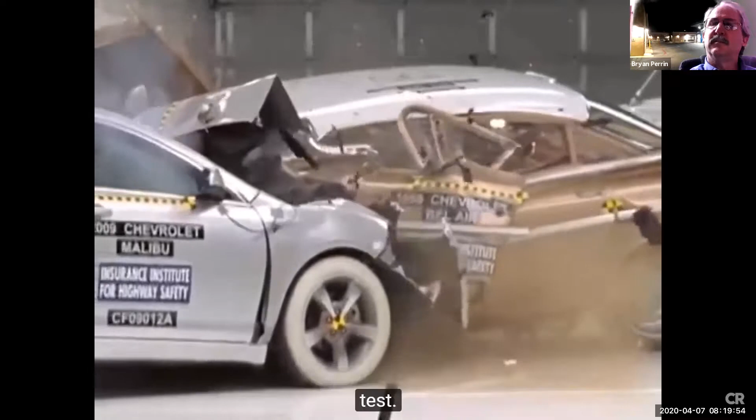Holy shit. Oh, you see? The new one is better. Told you. 2009 Chevrolet Malibu and 1959 Chevrolet Bel Air. In slow motion, you can see the differences in how the new and classic cars perform in this version of the traditional frontal offset test. The Institute conducted this test to commemorate its 50th anniversary.

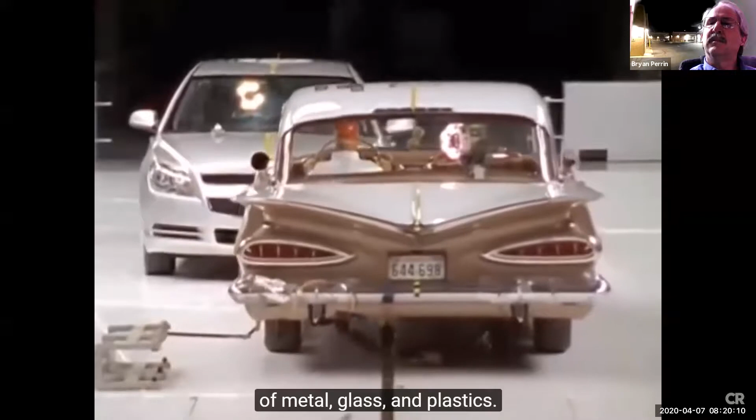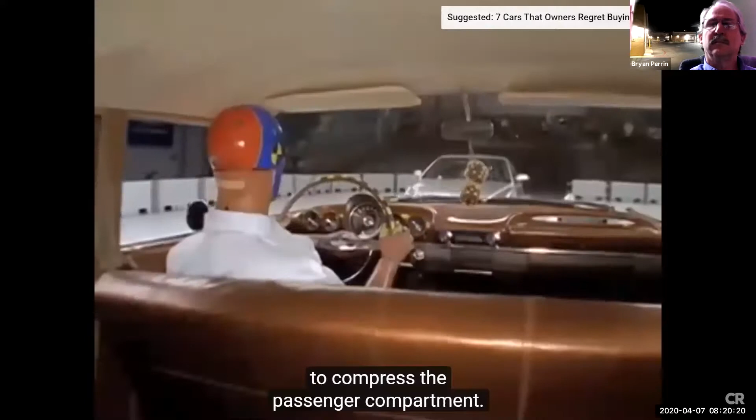It dramatically shows how much improvement has been made in passenger protection since the nonprofit organization opened its doors. The two cars collide in an explosion of metal, glass, and plastics. Where the Malibu crumple zone absorbs much of the crash forces ahead of the windshield, the Bel Air structure allows the lighter car to compress the passenger compartment. The impact is made worse for the Bel Air driver by the lack of airbags, head restraint, and even a seatbelt. Now, did you notice how that steering wheel came up right into the person?

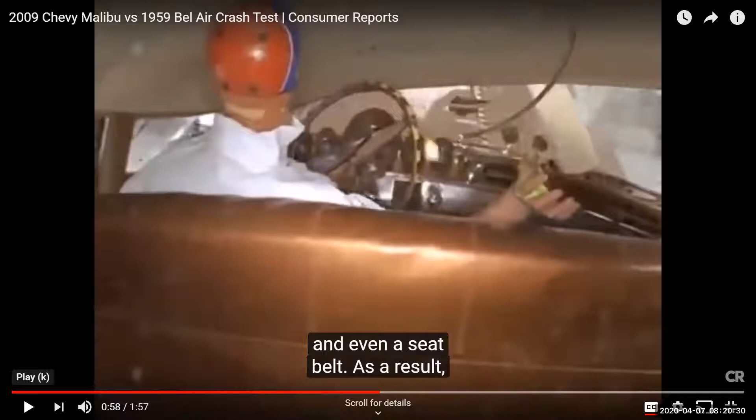Yep, damn. Because prior to 1967, steering columns were a solid piece of metal. They did not collapse. So that's kind of like a javelin going right into the driver. So 1967 saw a lot of safety updates, including seat belts, collapsible steering columns, dual reservoir master cylinders. So cars 67 and newer are much safer than cars older than 67. They're still not as safe as today's cars, but that was a big safety thing for them.

Someone else had a comment?

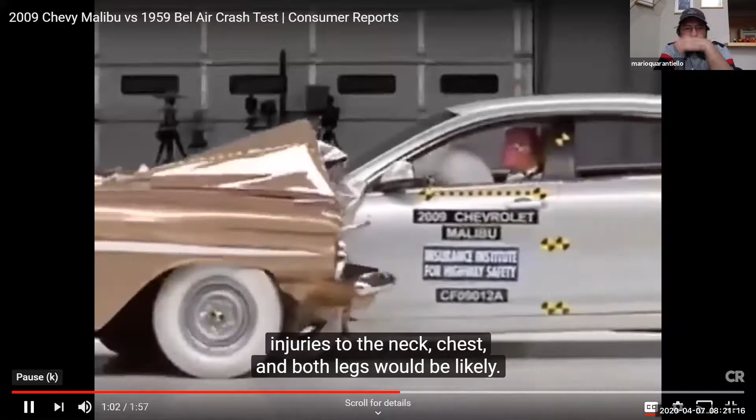All right, let's take a look here. So basically this car didn't have a headrest, didn't have anything other than a lot of size, right? So basically, that was an accident waiting to happen.

Yeah, and I'm getting picked on here because I didn't ask if we wanted to survive, just what we wanted. All right, I didn't say get in an accident, which would you rather be in? Apparently, being in an accident and surviving, I wasn't clear enough.

So take a look here. Also, take a look at the door. See the door here on the Malibu stayed in place. The Bel Air receives a poor rating across the board. On the other hand, the modern Malibu provides good protection, with the dummy movement being well controlled, measures indicating low risk to most body regions, though a foot injury would be possible.

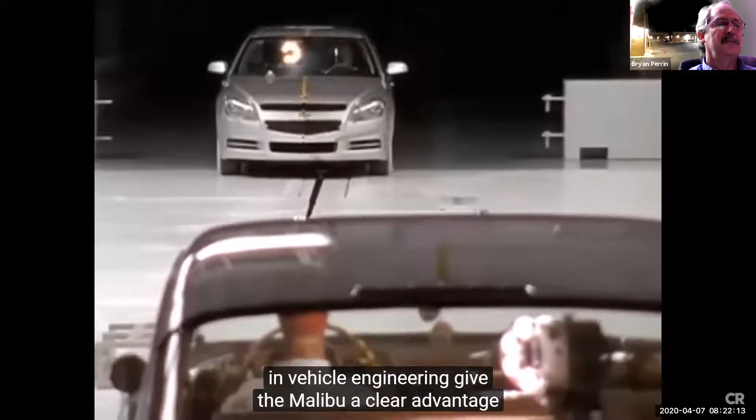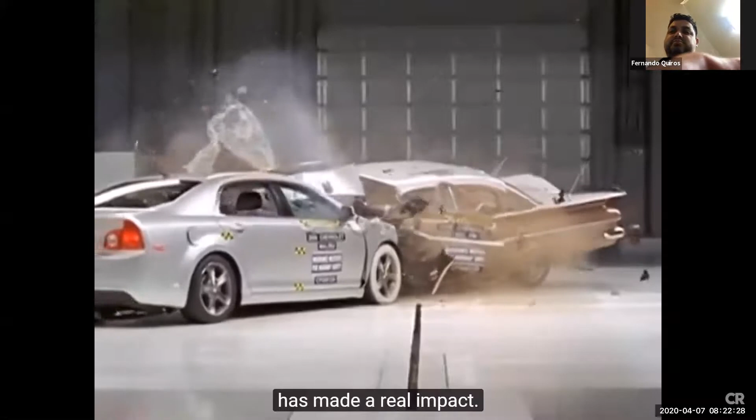Beyond the safety gear, advancements in vehicle engineering give the Malibu a clear advantage in this matchup. While classic cars are often considered rock solid, watch the door on the Bel Air, this demonstrates how much better today's cars are. And the IIHS has played a key role in driving these advancements. The Institute has made a real impact. The roads today are safer. For complete safety information, subscribe.

I mean, even the tire, no? Yeah, pretty amazing, isn't it? I mean, when you think about safety things, you don't think of door latches, you don't think of door handles, you don't think of how the door stays in place, you don't think of how the seat's bolted in. We kind of think of just airbags, but it's really all part of a system, the crumple zones, everything. So when we do repairs on vehicles, we want to keep that in mind to maintain that safety.

Does that depend also on how many miles per hour? I don't remember, it does say somewhere, I just don't remember. It's in the documentation because this test is standardized, so I don't remember how fast they're going, but it is a standardized speed.

Pretty amazing though, isn't it? That's crazy how the cylinder just got smashed up like that. I've had a lot of classic cars, and let me tell you, once I learned this and understood this, I'm a lot more nervous driving an old car than I used to be.

It's normal. But shouldn't there be headrests? It shouldn't be a safety thing, at least you know... the old car? What do you mean it shouldn't be a safety thing? It should be a safety thing. There is none, because of an old car. It's totally a safety thing. And, you know, we don't always think about that when we're in a car.

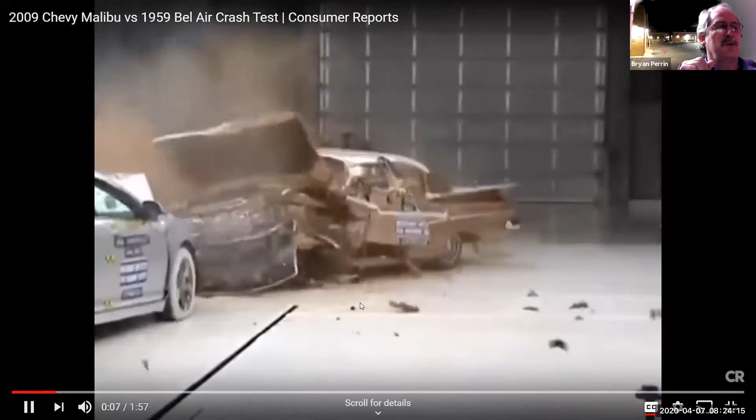And you can see, I'll play this again, you can see how much the airbag and everything else and the crumple zones really protect the driver in the Malibu.

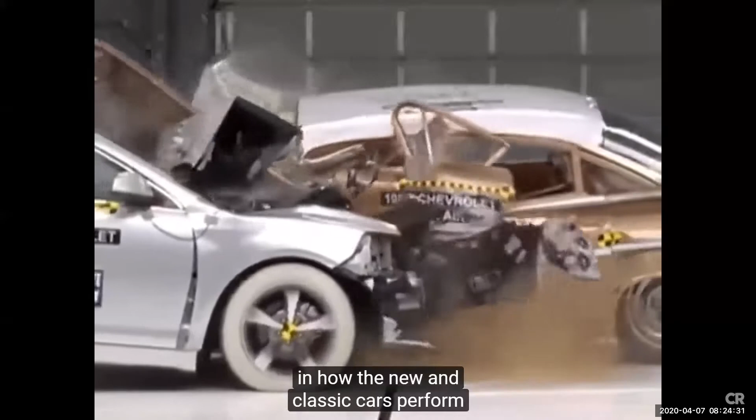Institute for Highway Safety's front crash of a 2009 Chevrolet Malibu and 1959 Chevrolet Bel Air. In slow motion, you can see the differences in how the new and classic cars perform in this version of the traditional frontal offset test. The Institute conducted this test to commemorate its 50th anniversary. It dramatically shows how much improvement has been made in passenger protection since the nonprofit organization opened its doors.

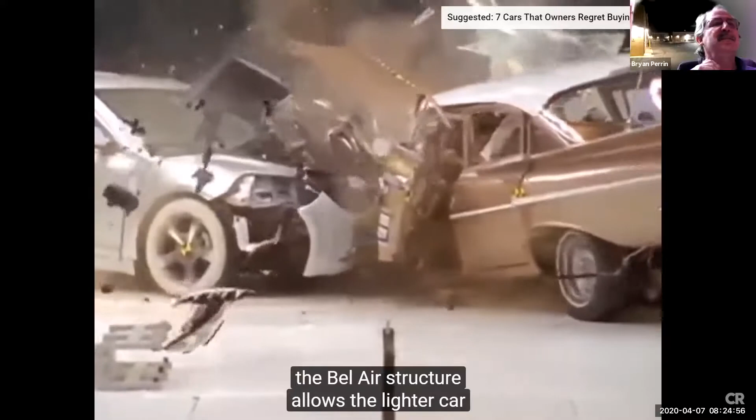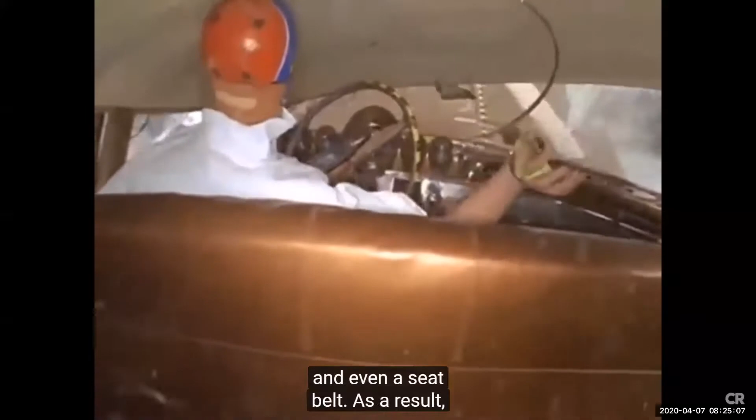Metal, glass, and plastic. Where the Malibu crumple zone absorbs much of the crash forces ahead of the windshield, the Bel Air structure allows the lighter car to compress the passenger compartment. The impact is made worse for the Bel Air driver by the lack of airbags, head restraint, and even a seatbelt. As a result, injuries to the neck, chest, and both legs would be likely. Consequently, the Bel Air receives a poor rating across the board. On the other hand, the modern Malibu provides good protection, with the dummy movement being well controlled. Measures indicate a low risk to most body regions, though a foot injury would be possible.

Beyond the safety gear, advancements in vehicle engineering give the Malibu a clear advantage in this matchup. While classic cars are often considered rock solid, this '59 demonstrates how much better today's cars are. And the IIHS has played a key role in driving these advancements. In the past 50 years, the Institute has made a real impact. The roads today are safer for it.

So pretty amazing, isn't it? Yes, oh yeah. So it definitely has an effect on what we're seeing and what is visible to us, and it should kind of make us think a little bit about the cars we drive and how important those safety features are. A lot of times people buy older cars because of cost or because they like the lines of it, and I drive some older cars too, so I get it. That being said, I'm also well aware that sometimes things are not as safe as I'd like them to be in doing that.

And I see a ha here and then XD. I'm assuming that Shirley has a little Scion XD by that post. Is that correct, Scion XD? Hey, don't laugh, those are good little cars. So it is a laughing face, okay. It didn't come through as that. All right.

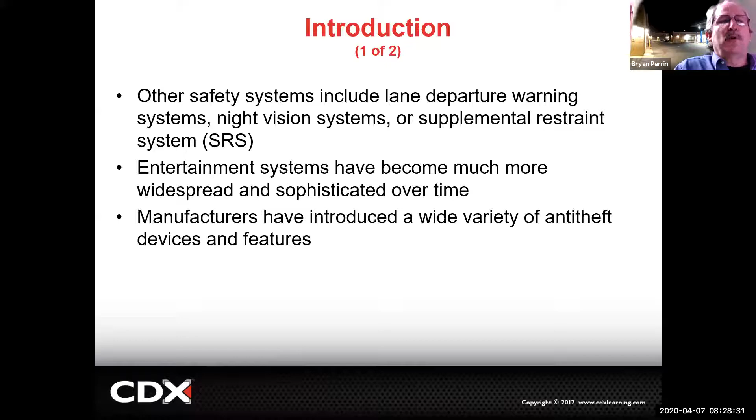Entertainment systems have become much more widespread and sophisticated over time. When I got my first car, it was a big deal to get a cassette player in it with 2 speakers. Now people have cars where the stereo system's worth more than the car. So we've come a long way in sound.

Manufacturers have introduced a wide variety of anti-theft systems and features also to vehicles, making it much more difficult to steal. That's why alarms, which were very popular in the 80s and 90s, aren't as popular now. It used to be the first thing you did when alarms first came out is if you bought a car, you put an alarm in it. Now they come from the factory with anti-theft systems.

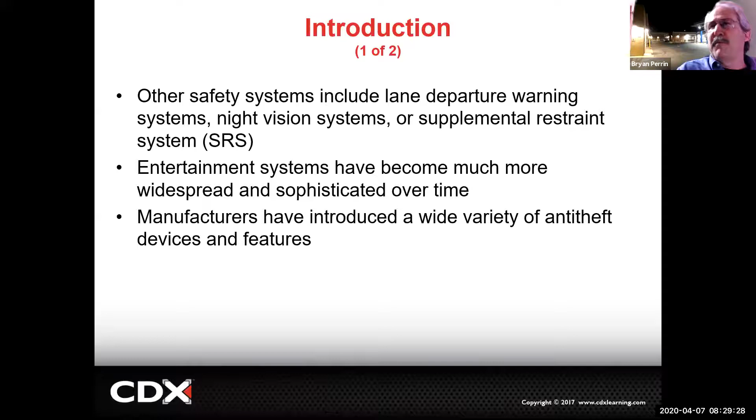You can imagine if I'm driving, like when I was driving to the airport in Virginia from where my daughter lives down to the city with the airport in it, it was pitch black. No street lights on the road, no nothing. It was completely dark, no moon, no nothing. And it was raining, so it was really hard to see. I was going at speed limit, real cautiously, and you really couldn't even see where the road was going. They didn't have good reflectors in the road or anything. So you could see where that thermal imaging, that night vision, could be really, really important for driver safety.

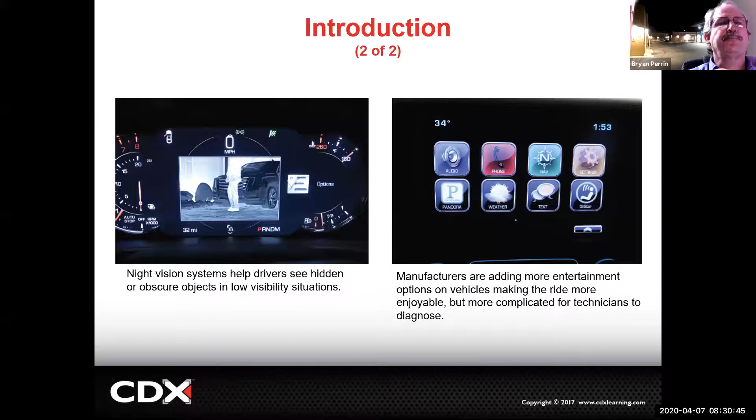One of the things in here talks about diagnosing operation of comfort and convenience accessories related circuits, such as power locks, power seats, pedal height, yada yada yada. We spent some time doing that yesterday. So that's kind of why I tipped into it.

So we played with the mirror circuit. The mirror circuit and window circuit are going to work very similarly because what am I doing? I'm reversing the DC motor. So is my seat circuit probably going to work pretty similarly? Yeah, because I'm reversing the DC motor, which means I need to switch my positive and negative poles on the motor back and forth to get the different directions.

So once I look at how one of those works, I've opened this up so you guys can play with some of the different objects in it. One of the advantages of getting the online component, and one of the things we are concerned about missing, is you're going to get more of that hands-on type here, dealing with some of these different skill builders that we have. Here I'm still going to supplement that with stuff in Canvas. I want to do some demo videos where you guys can fill out sheets and some other stuff. But I think this is a big step forward for us.

Describe purpose and function types of cruise control systems. The book does a good job of this. It talks about the different types of cruise control, how we control them, and really how it's changed.

So cruise control was originally developed to help eliminate driver fatigue on long trips. For me, it tends to work the opposite. When I worked in San Diego till 10:30 at night and drove home, I couldn't use cruise control because I'd fall asleep, and I needed the input. I was afraid of falling asleep on cruise control, fall asleep at 70, it's going to be bad.

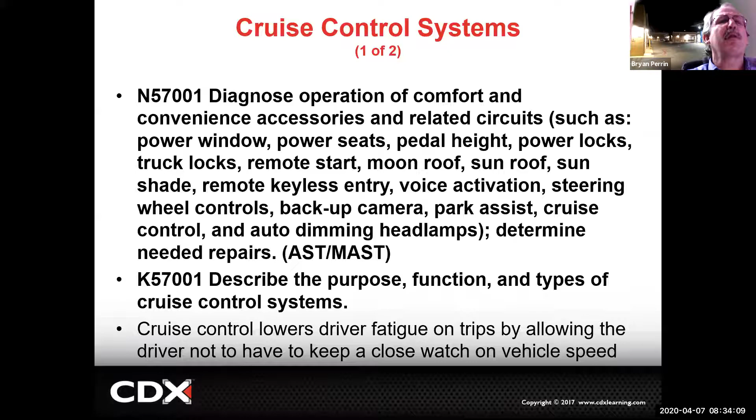So cruise control allows the driver to set the vehicle speed and the system maintains that speed.

One of the issues we had with cruise control is what? If I have the cruise control set at 70 and I'm coming up on someone in front of me going slower, I would need to turn off cruise control or hit the brakes to deactivate it, otherwise I'd run right into the back of that vehicle. Like in LA? Yeah. Or even here in San Diego County.

So the cruise control maintains the speed, it doesn't adjust if you want to go faster, you need to take it off or something like that? Yeah, you need to take it off, there's a couple different ways we can do that. If I want to go faster, say I want to pass somebody and then come right back to the same speed, I can just put my foot on the accelerator pedal and drive faster. When I let off the gas, it'll slow down until I get to that speed that the cruise control set.

The other way I can do it is I have two buttons on cruise control, one is called Set Accel. If I push the Set Accel button and hold it, that'll cause the vehicle to accelerate. The problem is when I let off, it'll hold whatever new speed I've just accelerated to.

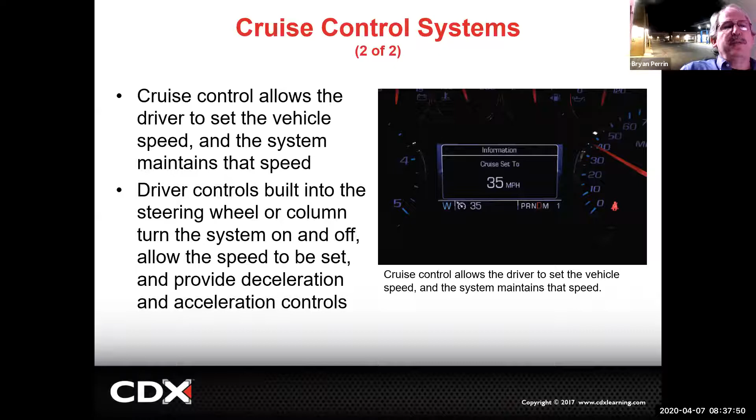So the driver controls built into the steering wheel or column turn the system on and off, allow speed to be set, and provide deceleration and acceleration controls. Mostly installed as original equipment accessory by the manufacturer. Matter of fact, they all are now. It used to be we would buy cruise control in a box for around $100, and we would actually install cruise control on a car that didn't have it. Manufacturer equipped systems enable better integration of the cruise control into the overall vehicle systems.

One of the three basic types of main actuators controls the throttle plate: electric, vacuum, or electronic operated. The electric actuator is a reversible motor that uses a reduction gear. The vacuum operated, which is what all the old systems were, so if the cruise control didn't work on an old system, the first thing we do is check if the vacuum hose had fallen off. And about 80% of the time, that's why it didn't work. So they use vacuum, a little vacuum operated servo, and then electronic style, a DC stepper motor is used.

So many of the ones in the 90s went away from vacuum. They used a separate electric motor built into a box that would have a separate cable going to the engine. So you'd have the accelerator cable, then you'd have a second cable coming from a little box about this big, and that would be the cruise control box, and it had an electric motor in it, and that's how it controlled that. So the first trick in figuring out why my cruise doesn't work is figuring out which system I have. And I can do some of that by opening the hood and looking, and some of that by looking at manufacturer service information.

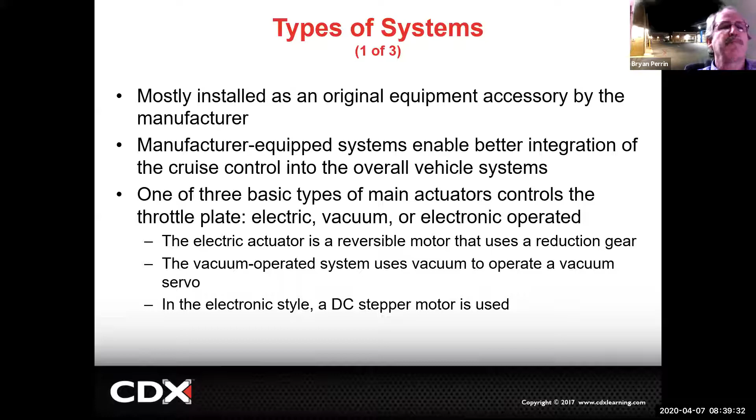So here's a couple types. Here I have an electric actuator. Has a little motor in there, and that little motor is just pulling on a cable. And that cable is going to pull open the throttle just like your foot would, and it holds it there. And it looks at the vehicle speed. If the vehicle speed starts going too fast, like going down a hill, it's going to let a little cable out. If you're going up a hill, it's going to pull a little cable in to maintain that speed. Just like your foot would on that cable if you were doing the driving.

Here we're using a vacuum. Before we had computers and all that stuff, the early systems just used vacuum. So we used intake manifold vacuum coming to the throttle, and we used that along with a control in order to set it and hold it. And we just hold that diaphragm. The early systems didn't work as good as the later systems, but they still worked amazingly well. But even by the 80s, we started seeing a shift to that electric motor.

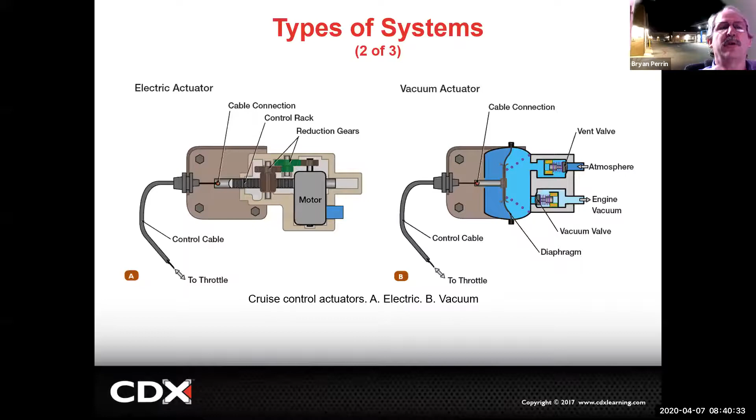And here is our electronic throttle. So the same throttle we use on a modern vehicle to accelerate with, because remember, I have no cable touching my pedal to the throttle anymore. It's all electronic. So what's the difference if the computer tells the throttle to open and go 70, or if my foot tells the throttle to open to go 70? No difference. So on newer cars, that's one reason why cruise control is so standard now.

It takes almost nothing to put it there. The controls are already there. Only thing you're doing is putting a couple buttons on the steering wheel. Everything else is already in place, on every car. We already have the computer. We already have the throttle. So the question is, do you want to let the customer have a cruise control? Well, it's so cheap to add. Customers see that as a luxury feature. It helps manufacturers sell cars.

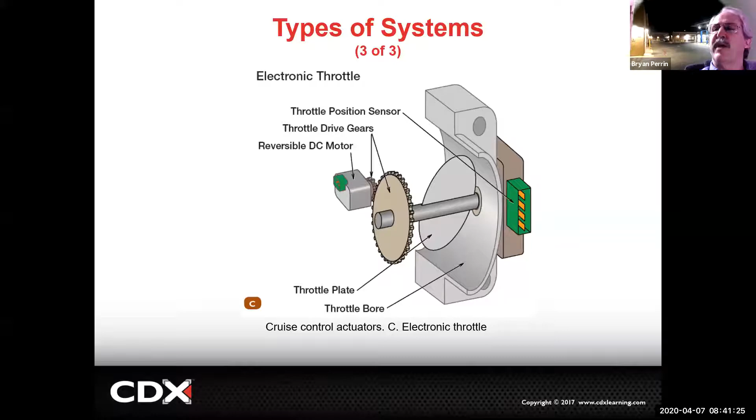So the principles of operation: the cruise control system works by comparing the actual vehicle speed to a preset target. So in order to do that, I need to have a vehicle speed sensor. On old cars, that would be up inside my instrument cluster and my speedometer, and I would have an output that came out of my speedometer. On newer cars, we use the ABS system, we use wheel speed sensors.

I might use a sensor in the transmission because there's some cars in the middle that just use a transmission speed sensor. In the days when we had to put these systems on cars that didn't have anything, we actually took a magnet, used a zip tie and put it on a drive shaft, and it had a pickup right here.

Every time the magnet would go around, it would generate an electrical signal on the speed sensor. We actually had to install that right on the drive shaft, and we'd zip tie it right to the drive shaft. That was the install. So one of the complaints used to be cruise control didn't work. It was aftermarket, so we'd look underneath to see if the zip tie was still holding the magnet on the drive shaft to make the thing work.

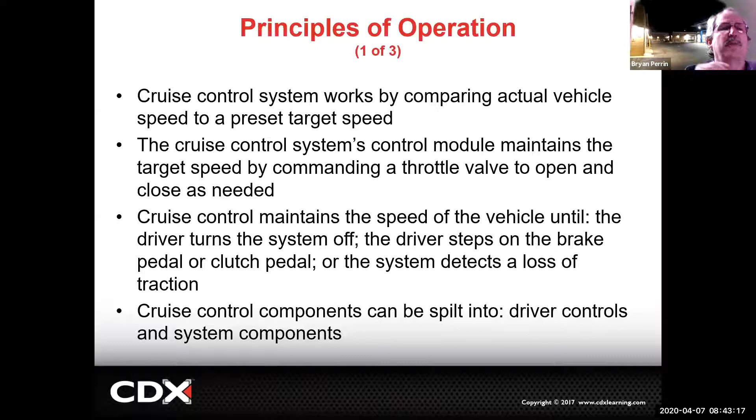Cruise control maintains the speed of the vehicle until the driver turns the system off, the driver steps on the brake or pushes in the clutch pedal, or the system detects a loss of traction. Loss of traction only applies on newer vehicles where we have traction control. Cruise control components can be split into driver controls and system components.

Here we see where we have a cruise control ECU. On a lot of cars, the cruise control ECU is actually part of the powertrain control module. We see we have power going to it, and I have an on-off switch - do I want the cruise control to be on or off?

I have the coast resume switch we talked about. I have the set, which allows me to slow the vehicle down. My set increase allows me to accelerate the vehicle. Some of them also have another decrease button, but normally they only have the two - the coast resume, the set increase - and then an on or off. Then we have a brake switch and a clutch switch if it's equipped.

It'll deactivate the system. Those are simple on-off switches that send a ground signal to the computer. If the computer sees a ground signal, it says 'whoa, we don't want to do that' - turn it off.

Then we have a throttle motor, which is the only output from the computer, and vehicle speed as an input. So it's basically looking at how fast am I going - I want to stay in this narrow range. I'm going to add and decrease throttle to stay between, say, 50.1 and 50.3 miles an hour. The older vacuum systems might have a 5 mile an hour range.

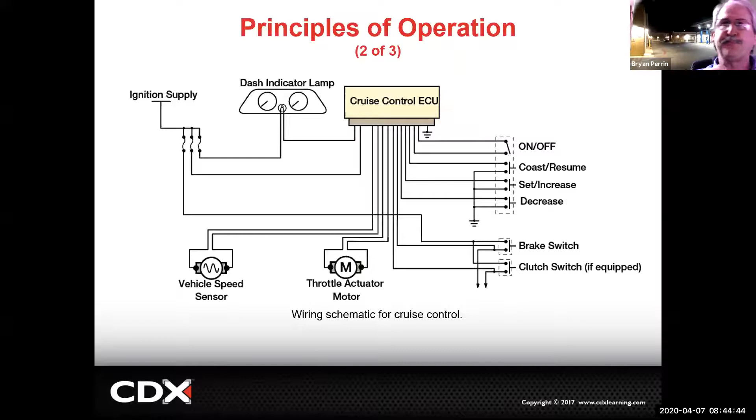The driver controls the on-off switch, so if my system didn't work, I'd want to test that switch - they go bad. I'd want to test fuses and power going to the module, especially if it's a standalone module. If this is a newer vehicle, I probably have data on my scan tool where I can go to this system, hit the buttons, and look at my scan tool - it'll say on, off, yes, no. It'll tell me if the buttons are working, which is much quicker than taking everything apart and putting a meter on it.

We need to keep in mind when we diagnose this, what generation car am I working on? What am I actually working on? That should get me a mental list of tools I might be able to use. Is it in every scan tool? No. How do you know it's there? Plug it in, go look, see if you can find it. If you can't, it's worth wasting the 3 to 5 minutes to do that. If you can't find it, then start taking the car apart. If it's an old car, it's not going to be in the scan tool.

And I got to be careful with 'old car' - it really depends. GM had these systems in their scan tool in 2000. Toyota and Honda did not. So it really is going to vary by car manufacturer.

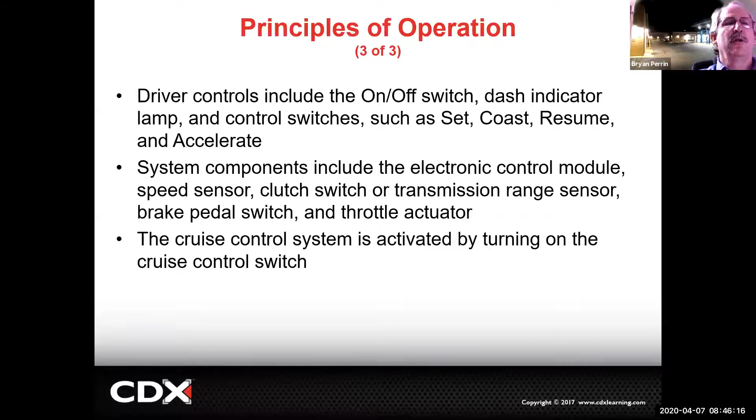System components include the electronic control module, which, as I said, is normally the powertrain control module, clutch switch, and transmission range sensor. Cruise control system is activated by turning on the switch. Newer systems use an electronic throttle control, also called drive-by-wire, no more cable. I'll get into this more, and the reasons why we do it, when we talk about air induction and performance, because there's some real performance reasons why we do this.

From a cruise control standpoint, basically it's an electric motor that opens the throttle, and that electric motor can either respond to the pedal I push down or to the computer itself, because it's using the same computer. Normally the PCM is what opens and closes the throttle, so why would I have a separate computer for cruise control? I wouldn't - I've already got all the functions going into my PCM. Just add a little bit more code in my PCM and we have cruise control.

Cruise control is integrated into the engine control system and does not require an additional throttle actuator. There's no physical connection between the accelerator pedal and the throttle. If there's no connection, you'd want this to default to mostly closed. So if I unplug the electrical connector, I don't want it wide open because the car would take off and never stop. These are spring loaded down to about 16% throttle opening, giving about 1200 to 1500 RPM. That's it.

When this came out, you heard a lot of people say the car's running away, it has a mind of its own, it's taking off. But it's impossible for this system to hold itself at wide open throttle. The only way it can go wide open is if there's an input telling it to, such as a mat stuck on the accelerator pedal holding it to the floor.

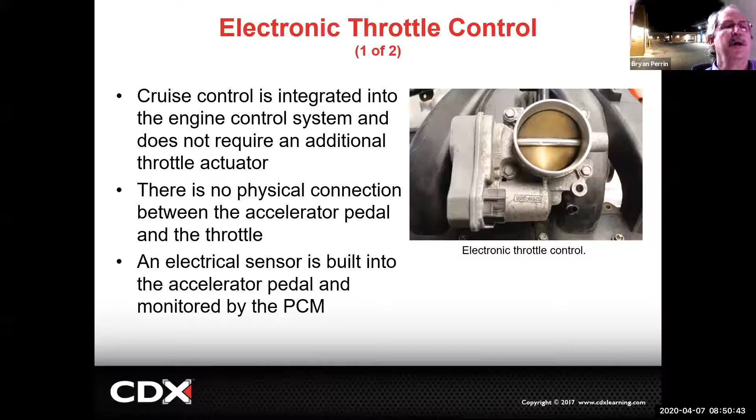The stepper motor is used to control the throttle, and the stepper motor is a DC motor. But instead of just spinning equally, it moves in steps, which is why they call it a stepper motor. The PCM adjusts the stepper motor in fine increments to control the throttle valve opening, giving very smooth, very precise control. The advantage of a stepper motor is the PCM knows how many steps it's moved.

So it knows, probably in its program, that on level ground, if you want to do 70, maybe it needs 65 steps. From there, it can do fine adjustments back and forth to match what you're doing. Or it can look at how much throttle you're giving it in steps, since that's a commanded decision, and look at the speed. So if it's taking you 80 steps with your foot on the throttle to go 50 miles an hour, it moves out to 80 steps, holds it at 80 steps, and I've got 50. Now from there, it's just doing fine adjustments to maintain that speed.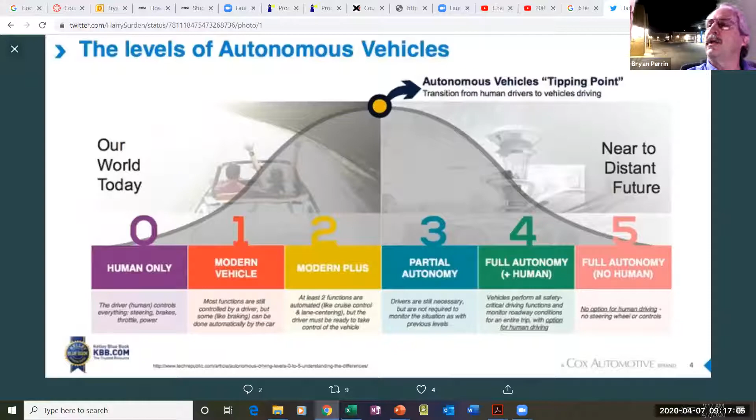So does this help you guys as far as autonomous vehicles and seeing what we're doing? Yeah, I had put it in my PowerPoints for this, but not in this one, so I wanted to share that with you. All right, let's go back to here, and that means I can close this and see that again.

If you guys want to get an autonomous vehicle, I'd suggest you get a Mercedes, because Mercedes was asked this question: if the car has to decide between hitting someone and getting you in an accident, Mercedes said it would do what's best for the driver, because he's the customer. You know what I mean? No, and that's the true story. I can see Mercedes saying that.

What's interesting, talking about adaptive cruise control, Mercedes first introduced this in Europe. A lot of things get introduced in Europe because they don't sue people as much there like we do here. The first versions of adaptive cruise control, going back 20 years, had two issues: it didn't see around corners, so if I'm coming around a big sweeping off-ramp with cruise control on, it wouldn't see the car in front of me and I'd hit it. The other issue is it didn't see motorcycles, so Keith would probably be pretty bummed if that car came up behind him, because it's just not going to see him. Those were the two issues with Mercedes' first generation adaptive cruise.

Now it's interesting you mentioned Mercedes. Mercedes technology, and really all Europeans, has always had an engineering philosophy about safety of their customer. That's really helpful if we have one of these cars that doesn't work, because I can go in and think, if I was the vehicle, how would I want to keep my person safe? A lot of times that's what's wrong with the car, especially when there are no codes. So if I have a European car, Mario, like your Audi, or anything else, and we're starting to see this carry over some into Asian and domestic vehicles, but it's still heavily a European concept, if I have something that doesn't work and there are no codes, and I can talk to the module on the network, meaning it's not dead, odds are it's doing something to protect the driver. So I need to look and think, what could the car be doing that it thinks is such a great job protecting my driver? That's why you have no codes, because it thinks it's doing a perfect job.

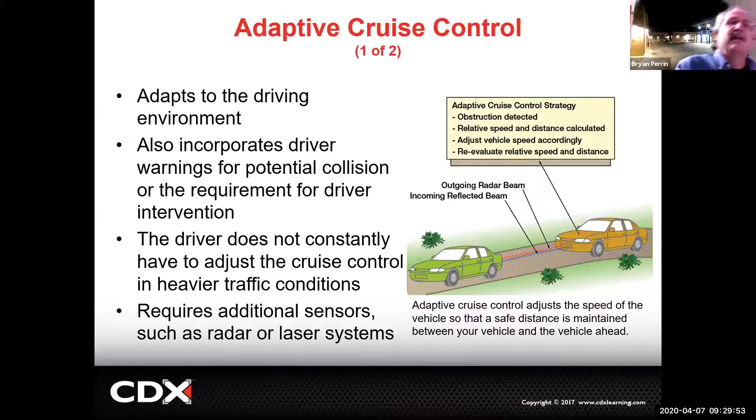Interesting times. So let's finish up on adaptive cruise here. Steering angle sensors are used to determine the vehicle's path. One question came up: what if it's out of calibration? Well, if someone did an alignment and didn't set the steering angle sensor properly, 1 degree after half a mile is a huge number of feet. Even at 100 yards, it's going to move you off. So you can see even at a couple hundred yards, 1 degree is enough that it won't see the car in front of you. It's pretty staggering - all these adjustments really have to be done correctly.

And it talks about the automatic braking.

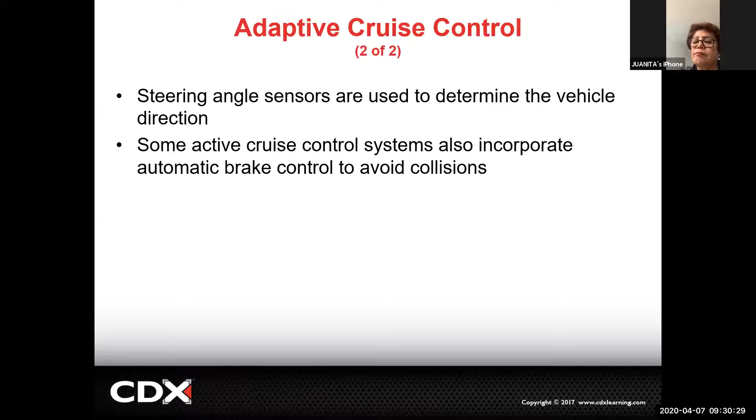So testing the cruise control system: verify the customer concern, research service information on how that system works. For a vacuum operated system, perform a visual check of the vacuum hose, in addition to the electric circuitry. For a fully electronic throttle system, use a scan tool to access any DTCs, research and retrieve codes.

Typically a digital multimeter or lab scope will be used to test the wiring and components of the system. A lot of these systems, we're using lab scopes now because we actually want to see what kind of signals are being sent out and brought back, and it allows us to compare.

For example, since I might have 2 sensors in there, wouldn't it be helpful to compare the 2 sensors at the same time and see how they move? It's real hard to do that just looking at numbers, but if I graph them, I can watch them move, or if they move opposite, I can watch one go low to high, one go high to low. I can look at the relationships and see that problem. I'm going to see it very quickly. So we've gone to using scopes for a lot of this stuff.

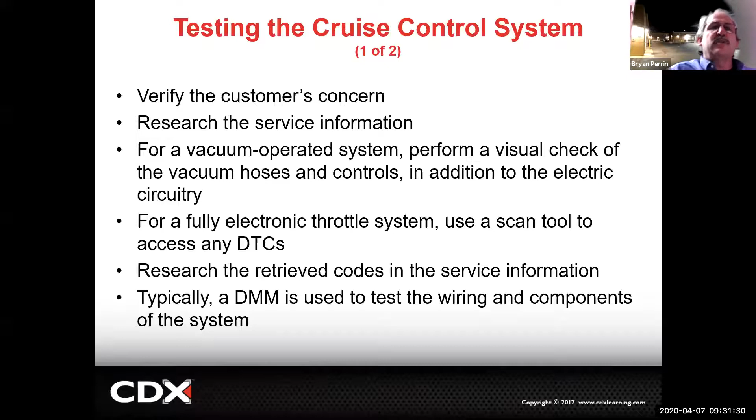Make sure you identify the root cause of the concern. Once the system is repaired, perform a test drive and operate the cruise control system to verify it's been resolved.

Most cruise control systems won't work below 20 miles an hour. So if you go out at 10 miles an hour, they won't work. If you try to use them on the rack where only 2 wheels are turning, they won't work. They need to see all 4 wheels turning. On older cars you might be able to get away with it, but it usually doesn't work well.

But on newer cars with ABS, since we're using ABS for the speed sensor, if it sees 2 wheels not turning, I get an ABS code. Cruise control is deactivated if I have ABS codes, because I'm using ABS for my speed sensor. So if ABS has a problem, how can I trust my speed sensor? I don't know what code set, all I know is I have a code. It's not going to work because I can't trust what it's telling me.

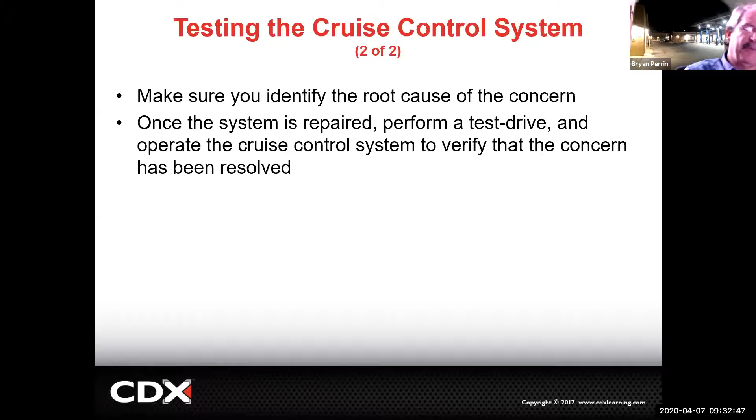So as we get into these network systems, like I talked about yesterday, a lot of it is, hey, if this doesn't work... What happens sometimes is the customer says, I don't care about the ABS light being on, I just want my cruise control to work. And we need to educate them that I really need to fix the ABS first, because I have no idea if cruise control is going to work, but I need that input. Sometimes that's a bit of a hurdle to go over with the customer.

So collision avoidance systems, I talked about that a little bit. Things such as horn, airbag, seatbelt pretensioners, and so on, collision avoidance systems are designed to help avoid collisions or minimize the severity of the collision.

So we're constantly integrating new parts into the system. We now have what are called active suspensions, where we can adjust the height of the vehicle based on the weight in it or based on cornering or what's going on.

So we actually see on some of these vehicles, if the radar detects that someone's coming in and going to hit the vehicle on its side, it'll actually drop one side and raise the other to brace for that side impact. It'll also roll the windows up, so that it keeps all your body parts inside. The car's doing this instantly off the side radar as the car's coming in.

What do you do if someone's running into you? Don't you kind of brace and go down and get ready to brace for them to hit you? Anyone who played football or anything knows that you kind of flex down, or whatever. We're doing that with cars.

Or for me, it was soccer, which is a full contact sport. Yeah, it is, absolutely. So as long as you're going for the ball, right? Oh yeah, especially if you're a keeper. Yes, especially.

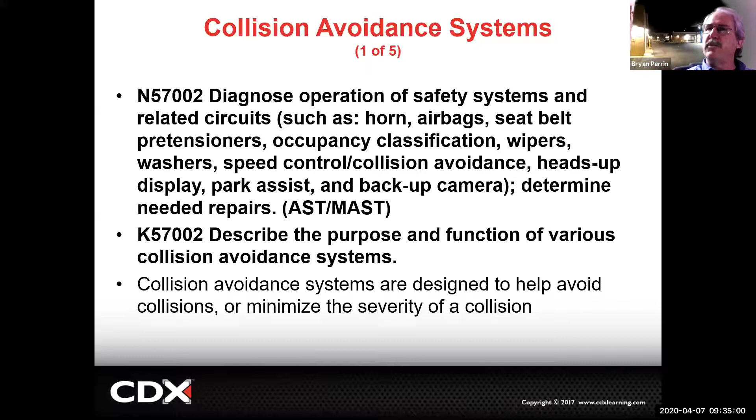So the cars are really, when we think of this, we've got more and more systems. Going back to what Keith brought up earlier, since these systems are on the car, now we're just talking lines of code to integrate them, to get them to work together in new ways. So I think we're going to see the acceleration of these technologies over the next 10 years, not just introducing new technologies, but finding new ways to use them together.

So common collision avoidance features include adaptive cruise, pedestrian detection systems. I did mention they really only like to see moving pedestrians.

Side collision avoidance, which goes in with my lane keep assist. Rear collision avoidance for when I'm backing out of a parking spot.

Lane departure warning. No, warning is not avoidance. Warning just means a light or a beeper telling you to do something. Avoidance means the car is doing something. So I want to show the difference in those terms.

Driver fatigue monitoring, the coffee cup on the dash. Night vision systems, we talked about. Active headlight systems, we talked about those. Pre-crash systems designed to give the driver a warning about a potential collision.

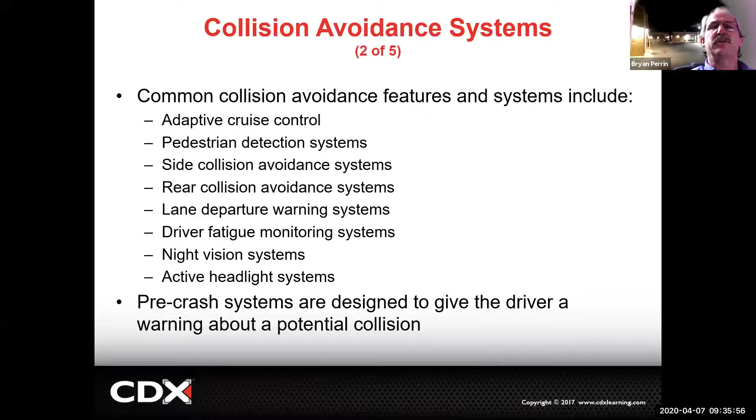So beeping, for example. So collision avoidance system, here we have an audible alert: obstruction to the left, steer right. It lets you know that, hey, you're changing lanes and there's a car there.

Are you changing lanes because you're reaching for your cell phone? Or are you falling asleep? Or are you actually trying to change lanes and didn't see the car? The system doesn't know. Its job is just to warn you.

And they do it in different ways. Some are just an audible alert. Some are a visual alert. Some are direct interaction, the steering command. If I'm moving over, the steering will actually move back to avoid the collision.

Electric steering makes that possible. So cars, electric steering is an advanced driver assist function. I know you guys learned about electric steering in the 507 class. The electric steering not only gives you the electric assist, it gives the computer the capability of steering the car.

So now we're down to code. Electric steering's been around for a number of years, and the steering angle sensor's been around for a number of years. But now what, I want to steer the car. Now we're down to code and a couple other things.

So they're able to do these different functions actively. We can apply the brakes. We can steer the car. We may need to tighten up the seatbelts if we know a collision is inevitable.

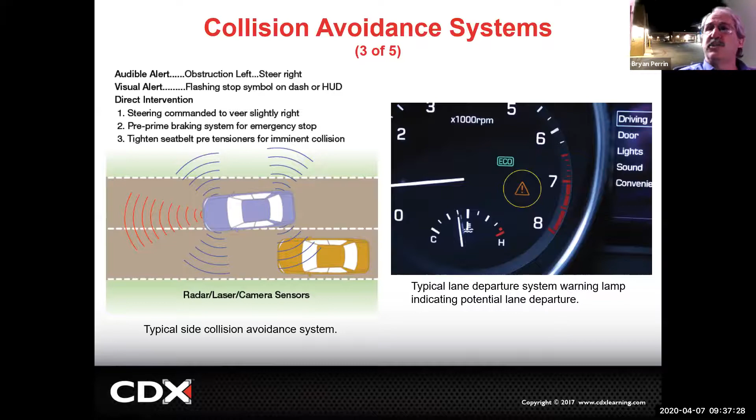Pre-crash system can sense where the driver's attention is focused, whether the driver is drowsy, or take more aggressive action. So there's two different ways we can do this. Cadillac uses a camera that's actually facing at you the whole time. If you look away from the camera for more than 8 seconds, it starts letting you know there's a problem.

The other systems use the input from the steering angle sensor. They're looking for torque change as your hand's on the wheel. It changes torque on the steering angle sensor. So they have the angle sensor, they also have a torque sensor, and they're actually able to measure the torque on the steering column.

And when your hands on the steering column are moving it, they're able to see that you're active. If your hand's not on it, it's only going to go a certain period of time, usually 20 to 30 seconds, and then it's going to say, hey, we want some attention here. Probably in the future, they'll add...

Learn your style of driving. Yeah. Adaptive, right? Yep, absolutely. I mean, they know the worst thing about a vehicle is the driver.

Okay, in lane sensor, I'm not sure what lane sensor is. My mother-in-law has actually her Toyota Camry, 2018, it has a kind of like lane sensor. So when you're swerving and you don't put your, you're gonna switch lanes, it starts beeping at you, kind of like going straight, not swerving back and forth.

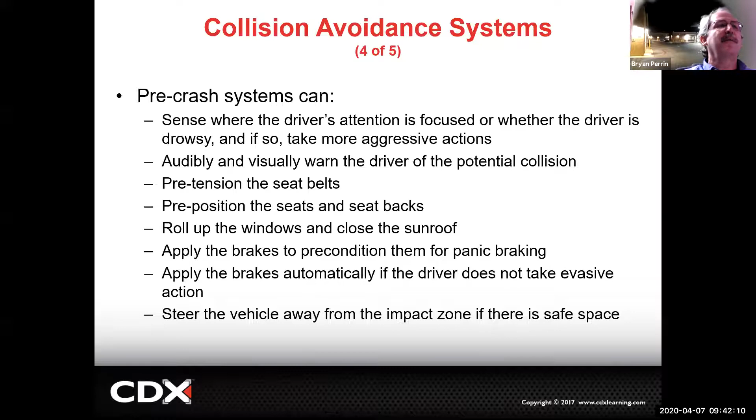So here's a collision avoidance system. We've seen this picture, or something similar to it, with a night vision camera already.

So proximity sensors and backup displays. Proximity sensors can be mounted in the front or rear bumpers or the side of the vehicle and allow for safe parking or backing. Color-matched piezoelectric sensors emit ultrasonic sound waves to transmit and receive coded sound waves.

So we can actually test these with a scope. I have an adapter that goes on my lab scope, and I put it about this far away from the sensors, and I can measure and make sure the sensors are actually working. That's one way I can diagnose those.

The control module determines the distance between the sensor and the obstacle, measuring the time taken for the sound wave to leave and return to the sensor. Proximity to obstacles can be indicated by separate audible and visual alarms integrated in the sound system. So a lot of displays, maybe with 4 proximity sensors, will light up and show me which one is seeing that.

One of the things we got to play with is we actually started putting tape over these proximity sensors to see how much tape it took before we could cause it to stop working and hit what we were backing into. Let me tell you, it took a lot of tape. But that was fun, so we spent time with these.

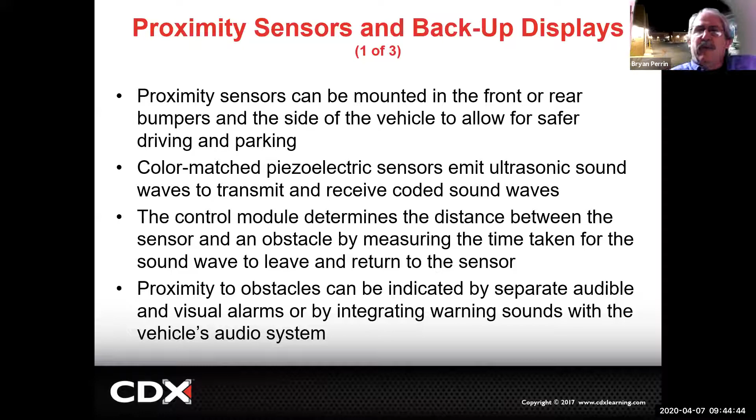So here's some pictures of some proximity sensors. On the right side is the backup camera display.

The backup camera display is not supposed to be part of the automatic braking, only the proximity sensors are. We did play with that some, covered different things up again, because what we find is there's what the manufacturer says how it works, and then we see if it actually works how they say it does. The only way you do that is by playing with it.

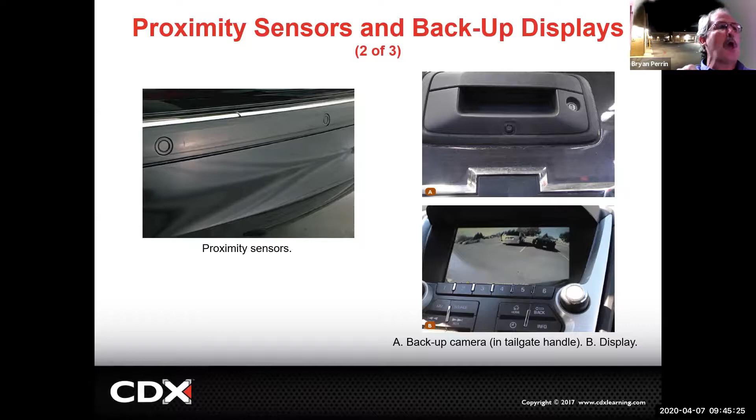I've gotten in a lot of trouble before going to classes.

So in the older model cars with proximity sensors, on some of them that don't have the camera display, don't they have a little light on the dashboard that says stop? Yeah, they have a light and they usually beep.

So the proximity sensors and camera are two completely different things, two separate systems. We had proximity sensors a long time before we started putting cameras on things. They're both here because it says proximity sensors and backup display. I think the manufacturer put them together because they both deal with backing up.

Another interesting thing about backing up is these newer systems. The old systems, the sensors would just tell you you're going to hit something and you hit it. The new systems will actually apply the brakes. What's interesting is several of the systems don't apply the normal brakes, they apply the parking brake, activating just the parking brake in the rear calipers to stop the car when you're backing up.

Does that cause the car to start spinning if they apply it too hard? No, because this system only works at low speed. They probably set a speed of 5 or 10 miles an hour where they're using that system. After that, they're going to use the service brakes and the normal collision avoidance with the radar.

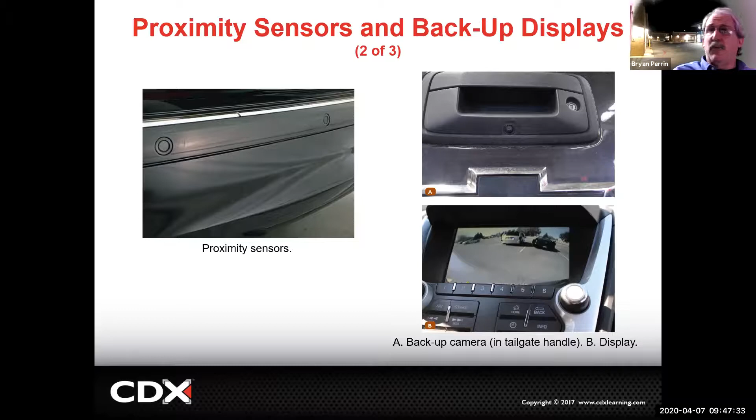That's the advantage of a network system. Great question.

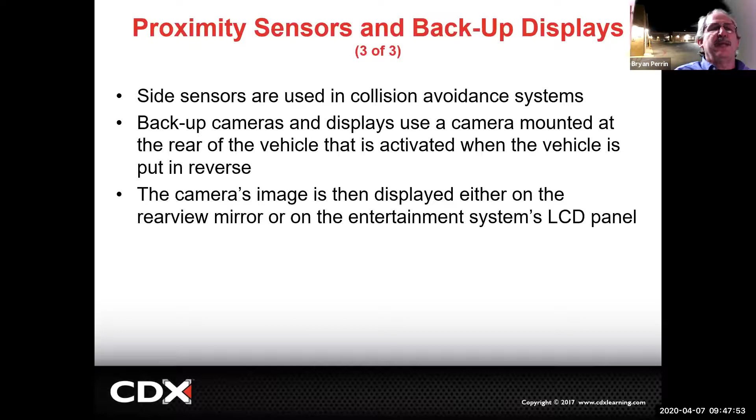I was playing with a 2020 Nissan Pathfinder, getting some lab scope patterns and taking bumpers off. We rented a car, so what do you do with a rental car? You take it apart and see how things work, right? Yeah, that's what I do usually. I've always been able to get them back. I had one I was a little concerned about, a Chevy Cruze years ago that I rented when I was up in Sacramento, and I had that thing really upset, it would not move. I had to get it reset, and I finally got all the lights out so I could drive it and return it. I've never had one I couldn't get back, but I've had some that were not as good as when I picked them up.

Also, I think the F-150 has a 360 view with the trailer thing. Yeah, what they do is put cameras on the mirrors, so you've got the two mirror cameras, front and back camera, and it gives you that virtual view from above. BMW was one of the first companies that did that, and it really is neat technology.

So let's look at our supplemental restraint system, SRS for short, which is our airbags. Purpose, function, operation of supplemental restraint systems and components. This refers to passenger safety devices such as airbags and seatbelt pretensioners. Modern vehicles have more than 6 airbags along with side impact protection.

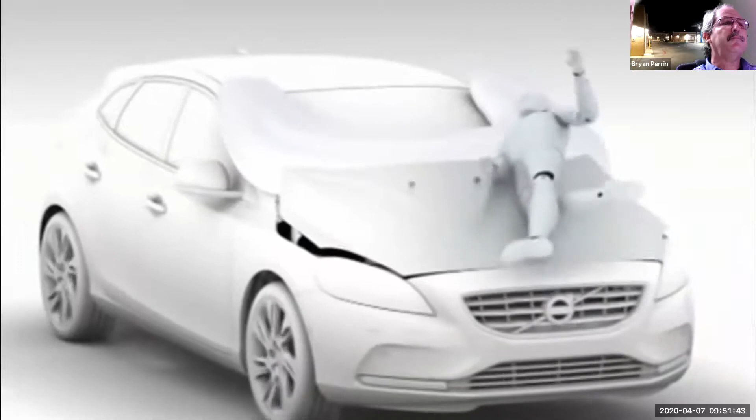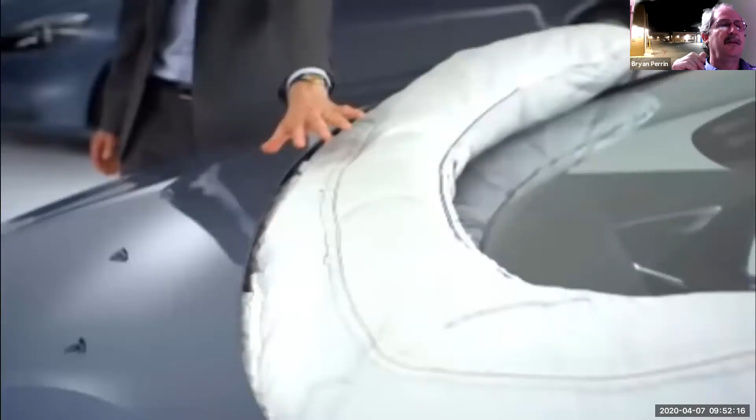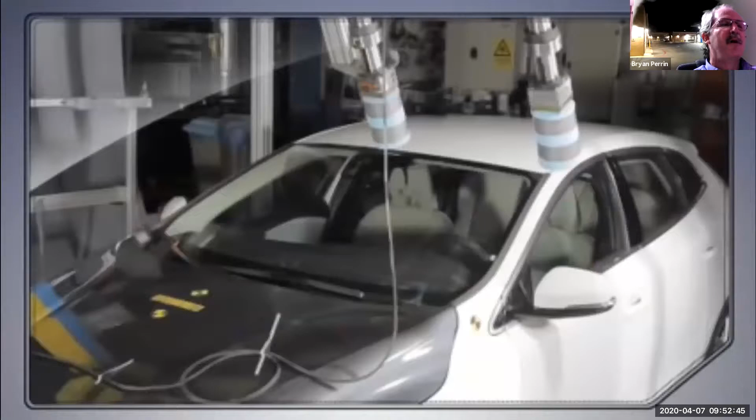The new Volvo V40 is equipped with a pedestrian airbag. It's designed to help protect pedestrians in case of an impact to the vehicle's front. In traffic, where people and cars share the same space, it operates at speeds between 20 and 50 kilometers an hour. People are soft and cars are hard, and in order to cushion the impact, the airbag has two purposes: one, to lift the bonnet to create additional space between the bonnet and the hard components in the engine bay, like the engine; and secondly, to cushion the area around the windshield wipers and the lower part of the A-pillars. To deploy the system, there are sensors along the bumper edge. These advanced sensors have been developed to recognize an impact with a human-like leg form. This is unique technology, tailor-made for the new Volvo V40. The system has gone through extensive testing and computer-aided engineering to verify its performance, both in different impact situations as well as different road and weather conditions. Along with our pedestrian detection with full auto brake, the pedestrian airbag technology is a great example of how we work holistically with safety here at Volvo.

So what do you guys think of that? I have never seen that before. So you learned something today. Yep, I'm so glad I had to see that. That inflatable thing was kind of weird, what's the point of that?

What's the point of it for people that don't know how to drive? To keep the person's head from crashing into the windshield. I thought they were going to put it at the front bumper and take people's legs out and watch them hit the hood. That's exactly what I was thinking, that's exactly what I thought in my head. I'm like, these people are going to be torn up by the time their head hits the window.

What's fascinating is even though this is a Volvo ad, this technology really took off and developed in Asia. So we don't actually have that here, in other words? No, we do have it here on some cars now.

I think that's going to be a more common thing in the next 5 or 10 years. Oh, absolutely, it's real common in Asia, has been for a number of years now. Asia, because of its density and size, has a lot more vehicle-to-pedestrian, vehicle-to-scooter accidents, so they're very concerned with the fatalities caused by that. A lot of this was developed in the Asian market, and we're seeing it now coming into European and domestic markets here too.

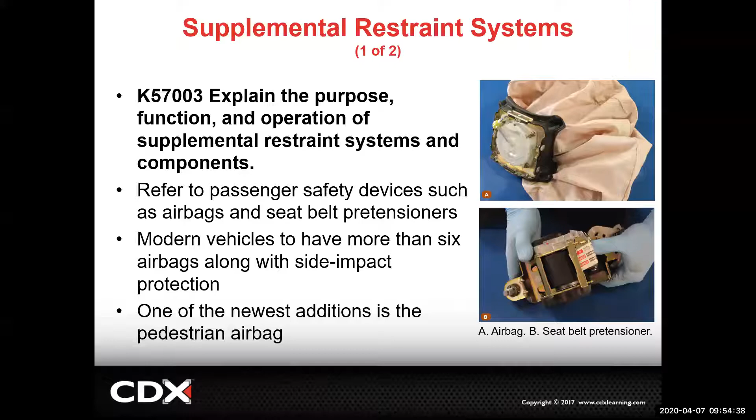So you guys saw an airbag you didn't even know existed today. Yeah, cool. You know, Mr. Tom told us once that in China it's not mandatory by law to wear a seatbelt, and it's a form of crowd control.

China tends to have more people than they know what to do with sometimes, I think. Yeah, I think the same with India. It's not required by law to wear the seatbelt.

Well, also traditionally in both those countries, not many people had cars, so the people that did have cars were more of the elite. India still has the caste system where you're born into a certain class and cannot move out of it. So India is still a very class-based society. That's one reason it's popular for people in a lower class in India to get a degree so they can immigrate to this country or European countries, because that's the only way for them to escape the caste system. No matter their education, they're still in that lower caste in India. But if they leave with a good education, they're able to change social status. That option isn't open to them in India.

So it is interesting how different countries treat and see their people.

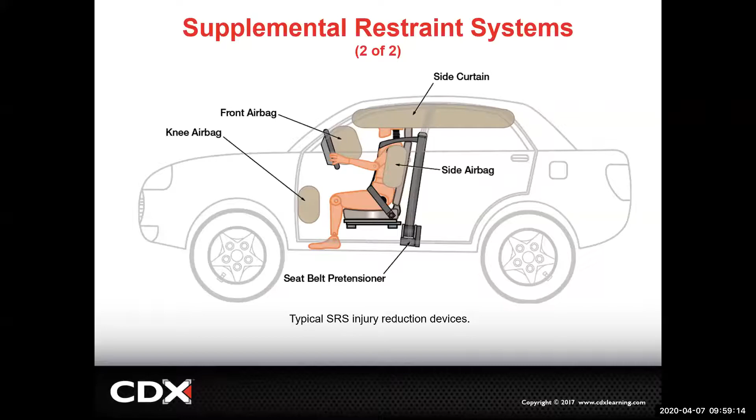That collision we saw with the '09 Malibu, the only injury the driver might have sustained could have been a foot injury. And that was a pretty substantial accident. So that knee airbag's purpose is really to prevent that.

Now, if I'm right up against the steering wheel like this driving, do I have a greater risk of injury than if I have a little more distance, driving at what's considered the normal distance from the steering wheel? Probably. That's why we're probably seeing some steering wheels now where the steering column, which we've had going back to the 70s, is now powered so it actually moves in and out. Because they understand not everyone's the same height. So I need to move my seat closer to reach the pedals, but then I'm so close to the steering wheel it makes an unsafe situation, so I need to be able to lower the steering wheel. Or another solution is, how about I just make the pedals come closer to you with adjustable pedals? So different manufacturers have addressed that differently.